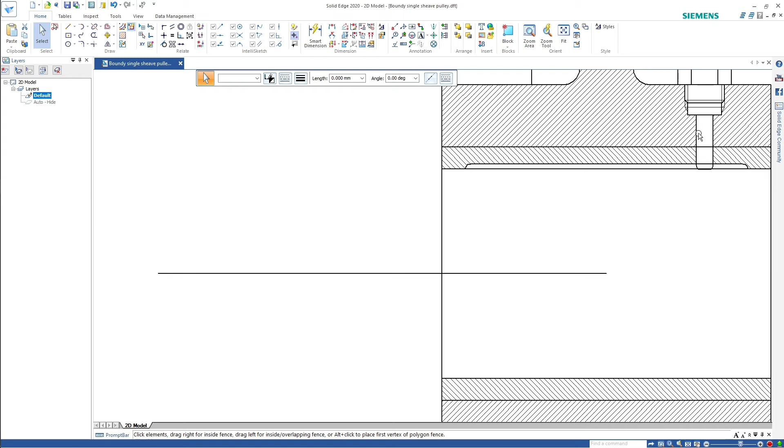So we'll just continue. I'll draw in item 5, the sheave pin. If you notice, the sheave pin probably should not be spinning. The thickness between the barrel of the pin and the threaded section, the measurement's not given.

If you have a look at item 6, the cheek plate, it's got 12mm plate, meaning 12mm thick mild steel plate. So I'm going to set the spigots on the sheave pin as being 12mm off the barrel of the pin itself. Let's just draw this in really quickly.

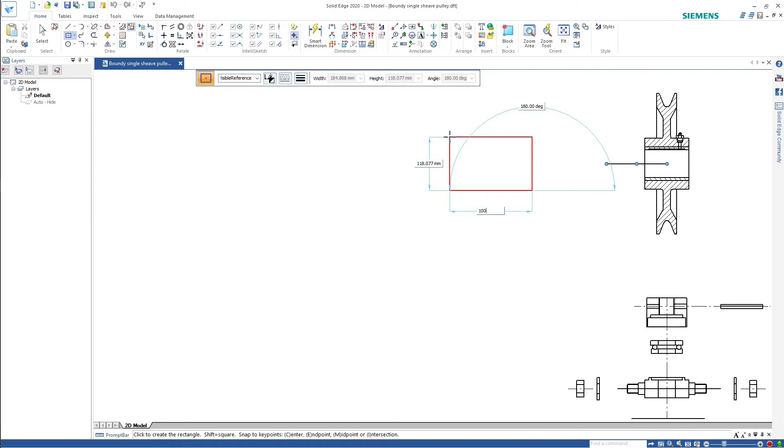I'll just start there, and that'll do me 1, 2, it's 100 by diameter 62. I thought I'd fix that. Let me fix up that line issue at the moment.

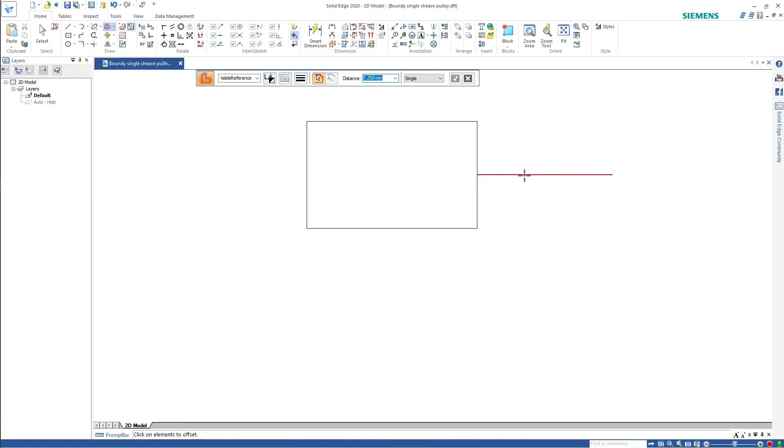So now working off this, I'm only going to do a quarter section, then I'm going to mirror it one way, mirror it the other. I'm going to offset that 15mm. I've also got the thread form there.

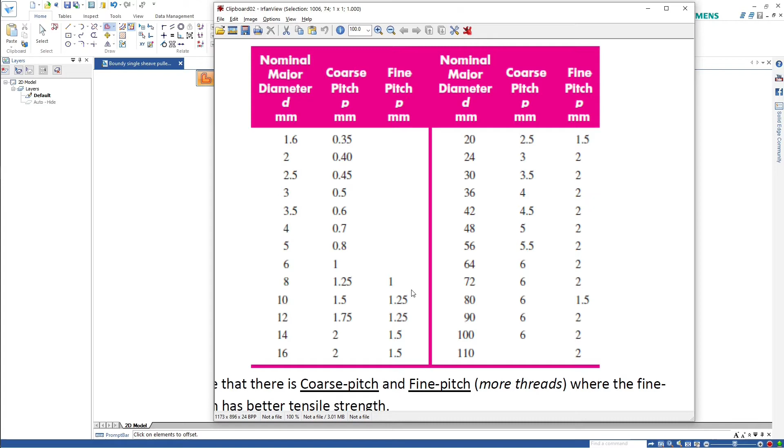It's an M20 thread, so let me just put in the 10. And of course we need to figure out that it's an M20 by what. There's our thread form chart, M20 by 2.5. The fine pitch gives you more strength, but it's not so common. M20 by 2.5, half of 2.5 is 1.25mm.

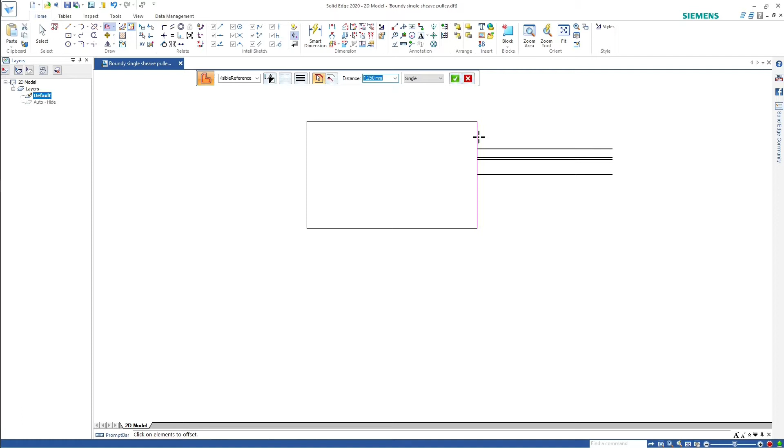That by 1.25mm. While we've got the offset here, set that as being out 12mm. And then it's 20mm out for the end of the thread. Let's now delete what we don't need.

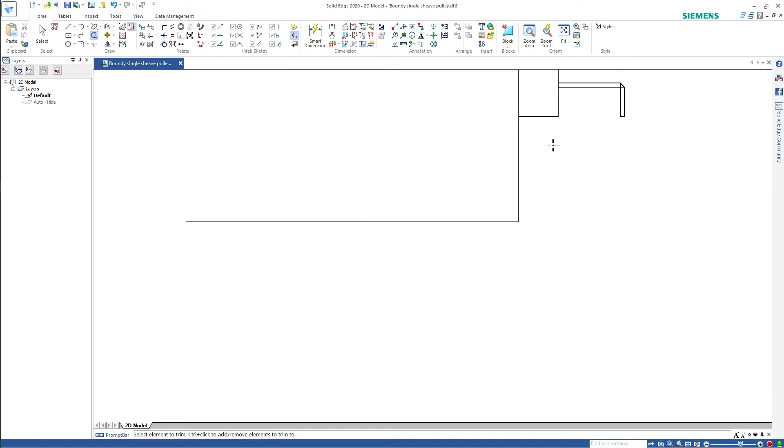For the thread, it's 1.25mm in. Those two there are thin lines, they're not thick lines. And that there is done. There's our thread form. I'll just remove that and that.

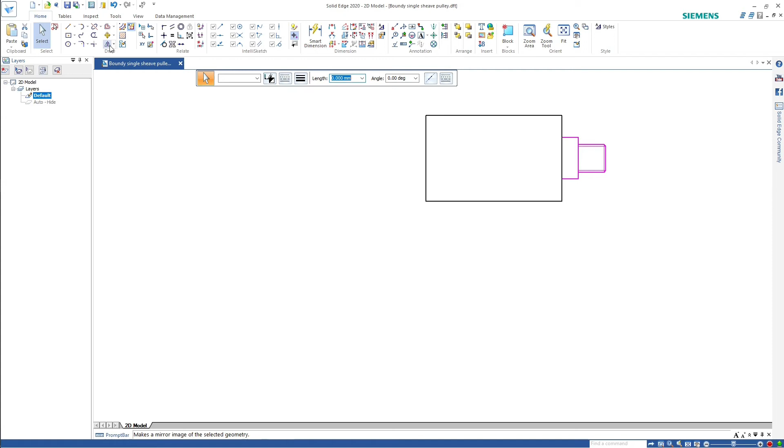Let's change that to 0.5mm. And let's get on with it, shall we? I'm going to mirror that effectively about there. If it wants to select, mirror all of that about there. And there is our sheave pin drawn.

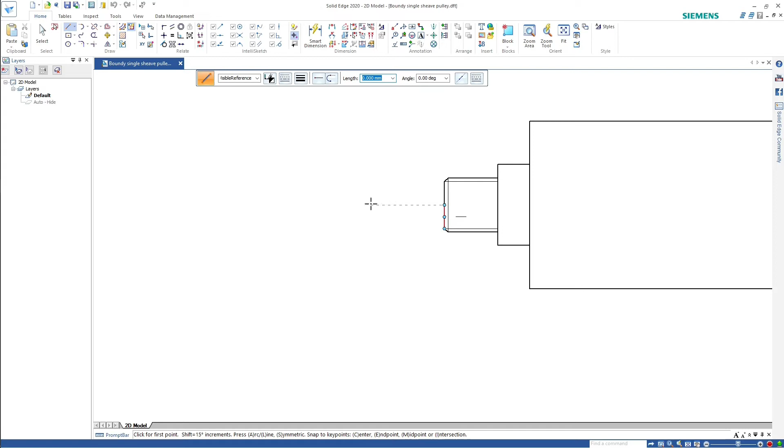Okay, now just to wrap it up, I'll just do items 6 and 8, the cheek plate and the spacer. I'll do 2 views of the cheek plate because it's not that difficult. Done. So I'll just put the center line in on that pin.

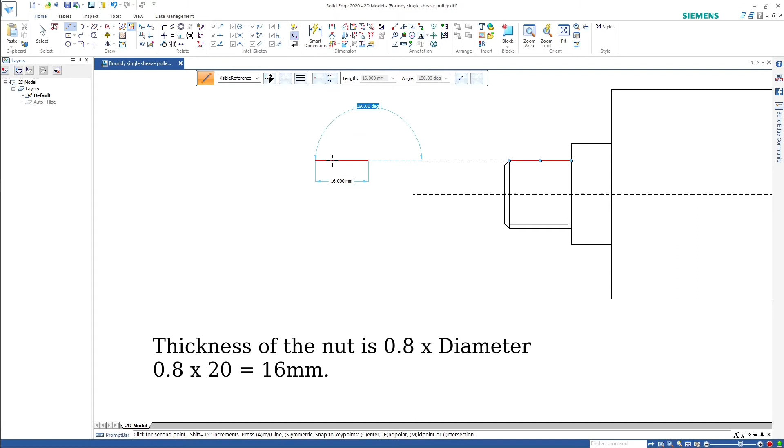Of course we need to draw an M20 nut. A nut is 0.8 times 20 is 16. Okay, and I might actually move that one down to the center mark. So we come up 0.45.

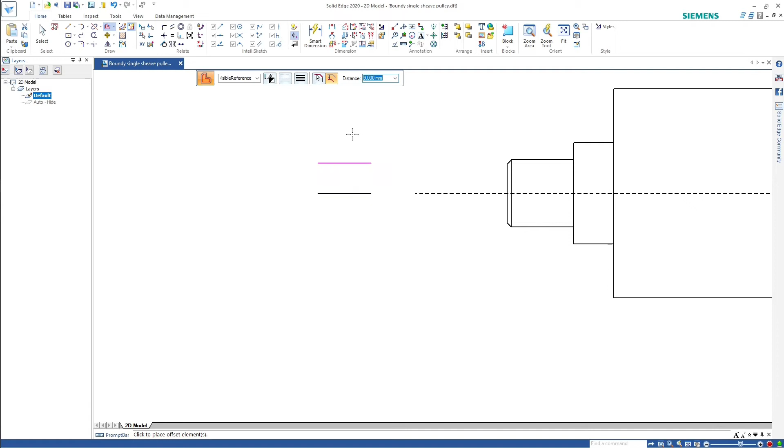So we go, 0.45 of a diameter is, offset please, 0.45 times 20 is 9mm. Done. So there's our bolt.

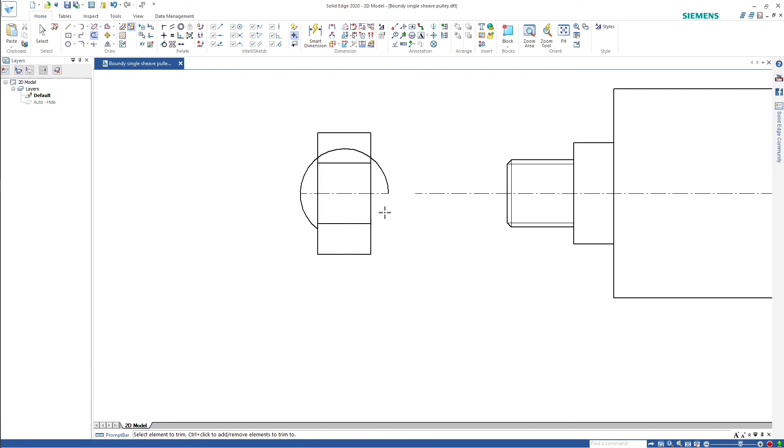I'll just mark that in here. That is the center mark. Let's just extend that out just a smidge. So there's the nut. We'll put a spring washer inside of it.

Spring washer. Washer is twice diameter, 2 times 20 is 40. Thickness of a washer is 0.15 times the thick diameter of the bolt, which is 0.15 times 20 is 3mm.

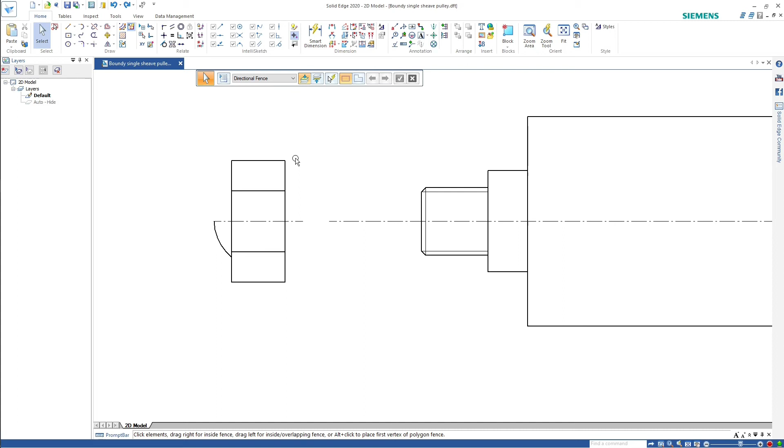Let me just do that again, I hit the wrong button there. As you could see, I gave it a 3mm angle. So it's 3mm thick, correct, by 40mm wide. And that is a standard washer.

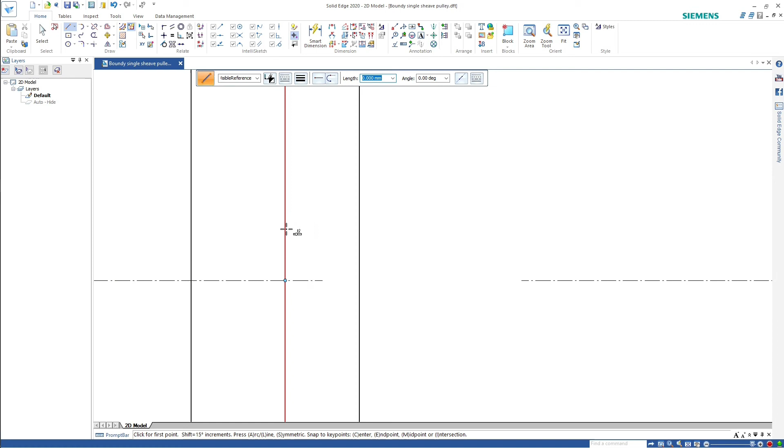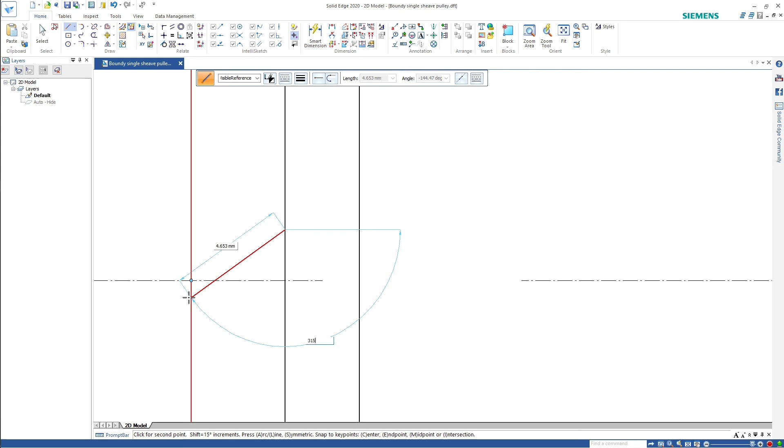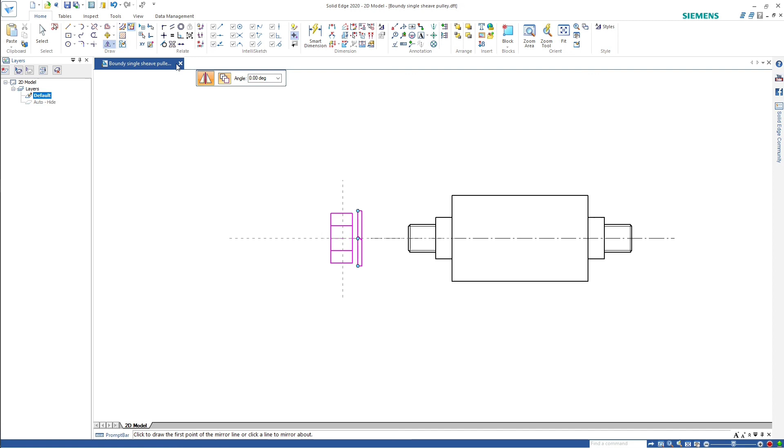I will just transfer that across to the other side as well. Mirror from there to there. So that's the nut drawn.